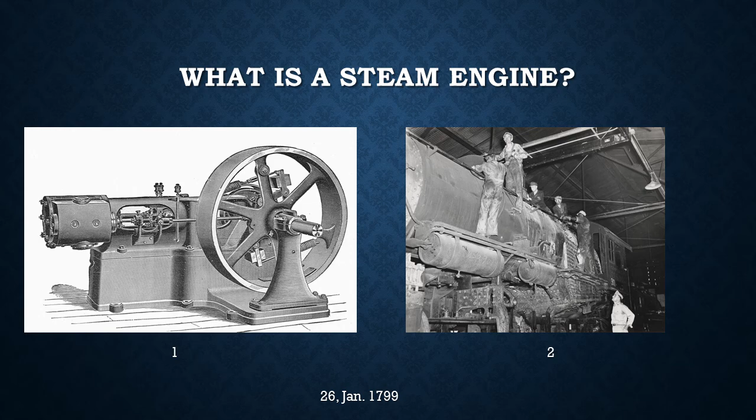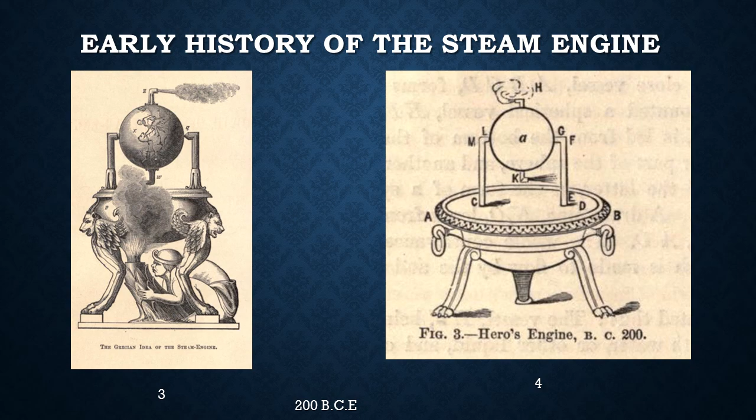The history of the steam engine significantly predates our course. The idea dates as far back as the year 200 BCE. Heron's engine, also known as the aeolipile, was a crude version of steam-powered movement which, while completely impractical and very inefficient, did produce torque. We can see a couple of examples here in this slide.

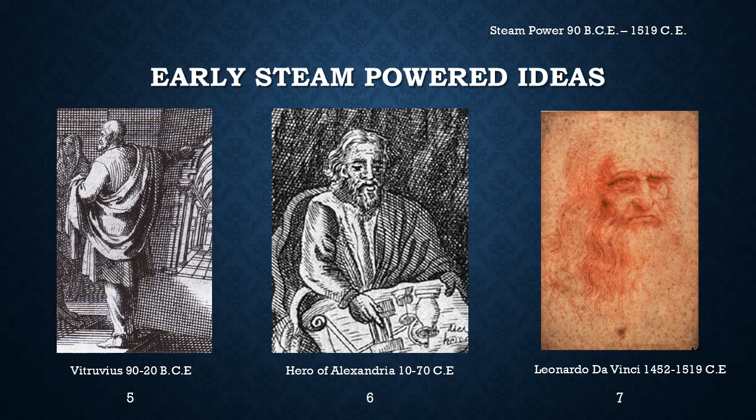The coal problem: the entire area of Great Britain has coal seams, and they are actually sitting on them. This meant that the mines for coal in the 1600s were near the ocean, causing a really high water table. Erosion means coal actually washes up on shore, and the British had a steady advantage because they wouldn't have to move coal 20 miles across land to ship it somewhere.

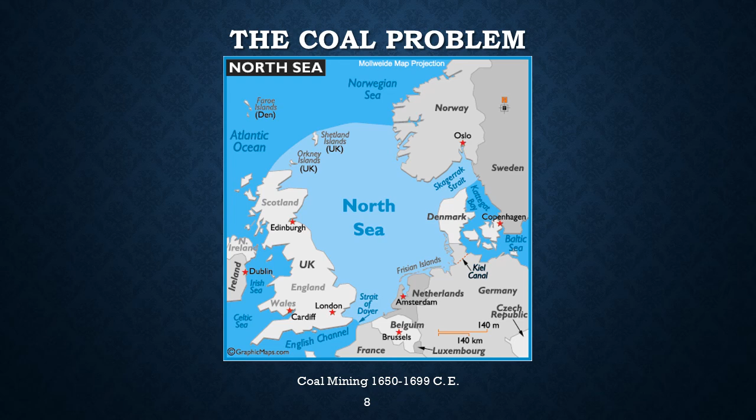It was already there. As they mined, they discovered that flooding was a serious problem because of the high water table. They determined that they could make a lot of money if they could figure out how to evacuate the flooded water from the mines. So they developed horse pumps, which were very expensive and drew on resources such as labor and horses, because one person always had to mind the horse and walk it around. It's a very inefficient system.

It had a low yield, so it didn't move a lot of water, but it did lower the water table enough that they were able to successfully mine some coal. So the idea was that they needed to come up with a better pumping system to evacuate more water so that they could make more money. Lots of coal was left farther down, but it was too expensive and too impractical to get.

Now, the steam engine was originally invented as a more cost-effective means of pumping the water out of these flooded mines, thereby allowing the mining of coal that was below the water table.

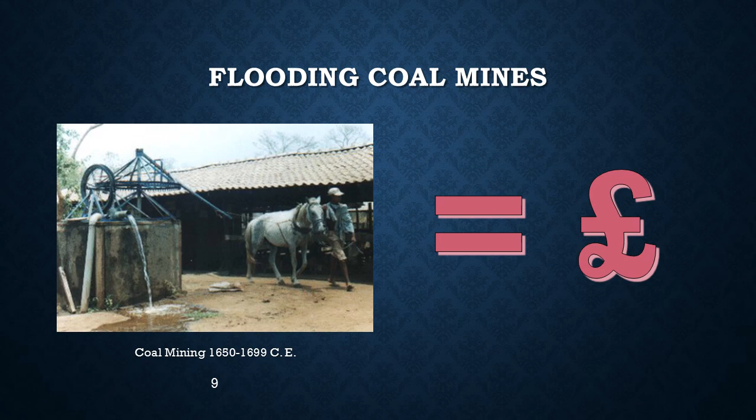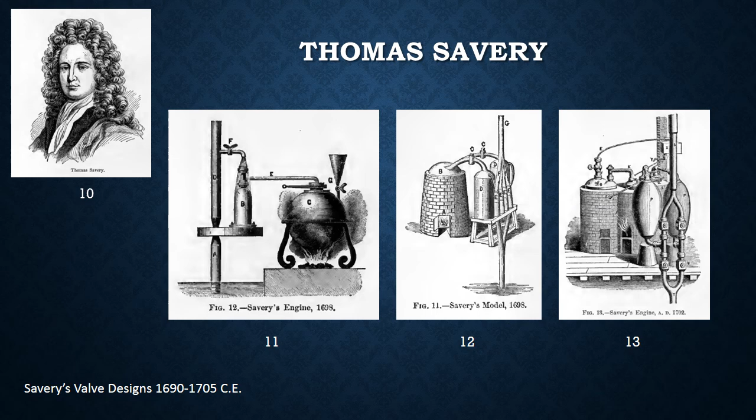This really wasn't widely available or widely used. Some large estates, some mines and towns used his design, but there was no safety valves on it, and he had to run the pressure up way higher than people believed should have been in his cylinders, so they were worried of explosions, and it really didn't catch on.

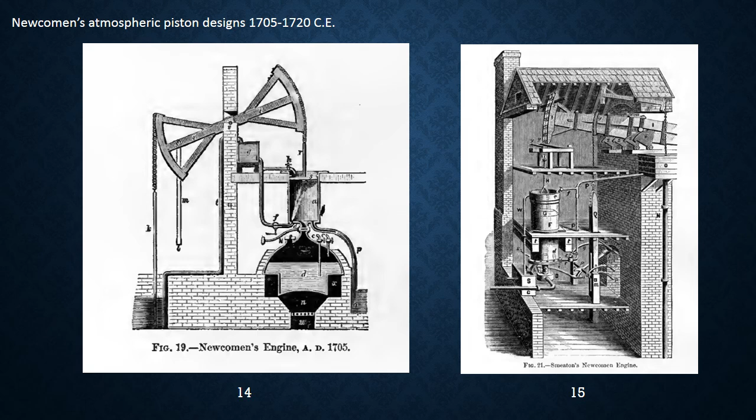This is the first commercially successful steam engine. This was one of the chief contributors to the beginning of the Industrial Revolution. It is a very inefficient design which limited its location to right outside of coal mines where there was a plentiful supply of fuel. It needed so much coal that it could not be adapted to run anything but a coal mine pump. And I was unable to find any examples where this did run anything other than that.

Now, Boulton was a wealthy, and he owned a small manufacturing company which was powered by a stream. A drought brought his manufacturing capability to a halt, and he began to explore the use of steam power to work his workshop, which would in effect be a cheaper and more reliable alternative.

The friendship between the 2 men blossomed, and they began to work on the adaptation of the steam engine to make it more efficient and useful for something other than a coal mine pump. Boulton supplied the financial backing, while Watt would provide the engineering and ideas. Now, Mr. Boulton allowed Watt to open a steamworks workshop in his Soho manufactory. They continued to make incremental improvements which both increased the efficiency and portability of the steam engine.

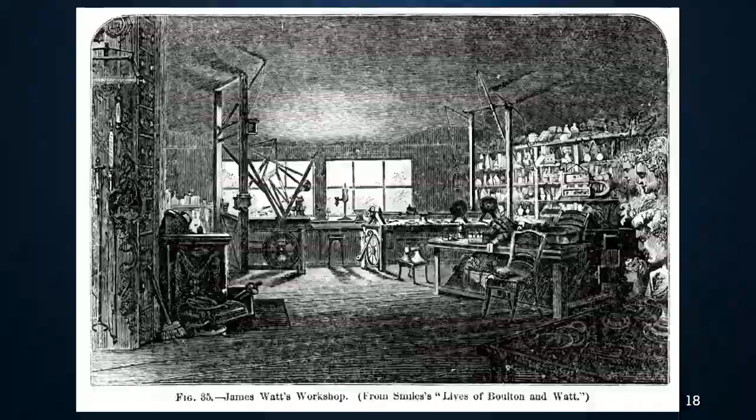The steam engine is primarily built using cast iron or another metal. The tolerances are very tight, and the pistons must be able to contain compressed steam. Flywheels are metal and needed significant weight to store all of the kinetic energy that is useful in the stroke of the steam engine. It was originally built using trial and error. As manufacturing methods became more refined, so too did the steam engine. By the height of the Industrial Revolution, steam engines were making the parts for other steam engines.

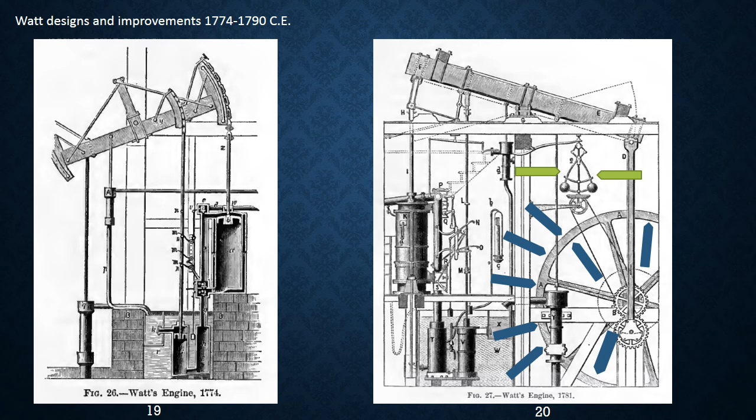By 1784, the steam engine had been developed in such a way that it had the power of the Newcomen engine we talked about earlier, but only required 1/4 of the fuel, according to the BBC documentary The Boulton and Watt Steam Engine.

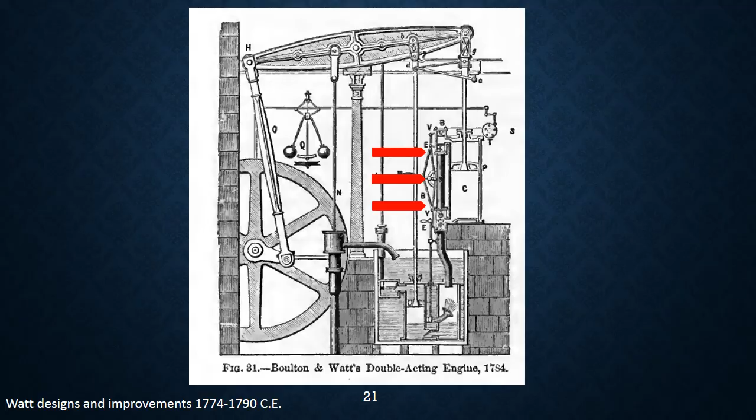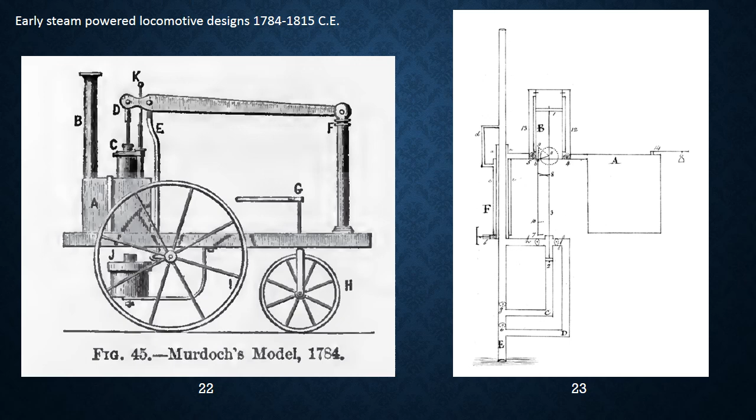The steam engine would be transformative for the entire world. Oliver Evans illustrates this in his patent application, dated the 1st of December 1792, when he says, 'These engines are of such simple construction that they may, with convenience, be applied to move any kind of machinery that requires either circular or vibrating motion, and to do the propelling of land carriages with heavy burdens in an easy, cheap, and powerful manner.'

As you can see, when trying to answer the question of who originally invented the steam engine, the response is very detailed and complex. There have been many people who were involved, and the invention cannot be attributed to one single person. The most influential inventor of the steam engine would have to be James Watt. He was really the driving force behind the innovation which sparked the Industrial Revolution. His designs and inventions were the building blocks which allowed the steam engine to become as important as it has.

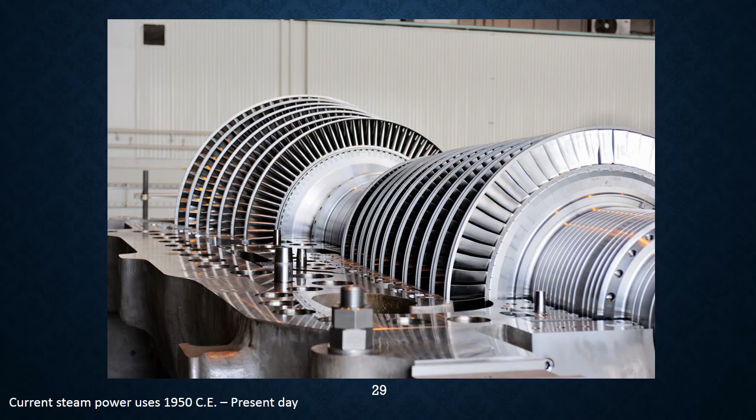The modern steam engine does not hold the same purpose it once did. It is very rare to see a steam locomotive or steam-driven pump. It is primarily used today as a turbine for electrical power. It is the primary way of power generation used the world over. The sources of heat are varied, such as coal, natural gas, or nuclear, but it is still the general principle of using steam to perform work.

The steam engine is still as valuable as it was at the height of its popularity. While the steam no longer performs the work directly, it supplies the electricity for the majority of the things that do the work. As you have seen, the steam engine has a wide range of uses over its lifespan.

Some were not useful at all, and others changed the world's industries. Originally, it was a machine that produced torque and ran in a circle. Then it was used to pump water from mines, making resources obtainable, and in the process, getting them safer. The expansion to manufacturing allowed many products to be made quicker and cheaper. When it became a transportation mechanism, we were able to bridge the world and expand trade. The speed and efficiency of steam travel opened up new avenues and ways to transport perishable goods.

Even today, we are reliant on steam power the world over. It supplies the electricity which runs everyday modern conveniences we have. It's hard to imagine a world without steam power. This is why I believe the steam engine is the greatest invention of all time.